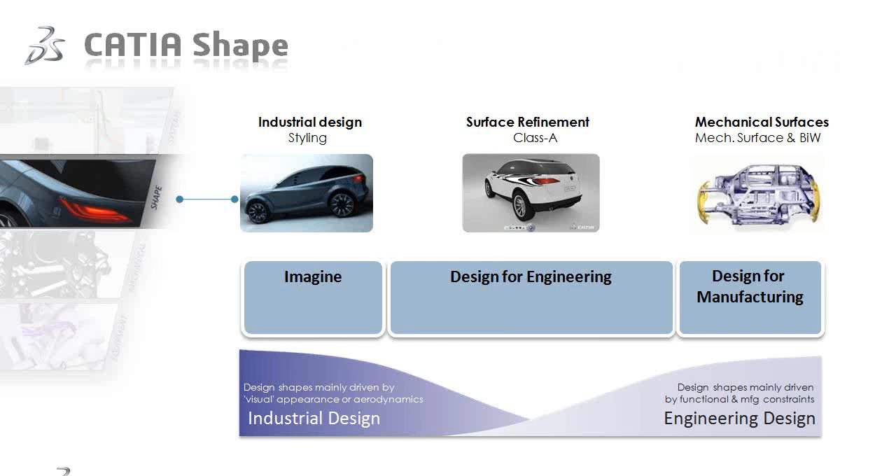Dassault Systèmes now provides 2 solutions on the market for Class A surfacing. You'll find the Icem Surf classical solution, which is still available as a standalone software with a best-in-class explicit modeler for Class A surfacing. So you will find classical modules from Icem Surf: Icem Pro, Icem Master, Icem Magic.

And of course, the main solution Dassault Systèmes wants to push now is CATIA Icem, which is already available in V5 and V6 CATIA releases. Dassault Systèmes bought Icem technology in 2007 after 2 years of partnership because we wanted to provide a solution within CATIA able to satisfy high-end quality surface designers. For that, we needed Icem experience to bring Icem Surf's advanced mathematics into a CATIA workbench, able to keep the history of construction, and finally bring the associative data model to digital sculptors, because it was not available for them, as it was for engineers or manufacturing designers.

So a quick word about CATIA shape strategy. For CATIA Icem, we have two drivers. First, we are focusing on some new direction for the solution, because today if you take a Class A modeler, everyone in the community of Class A modelers, and also of course in styling departments, is trying to make the work evolve and is always searching for the best methodology and best tools, knowing that the industrial context is more and more challenging, especially on the innovation aspect, because it's a key differentiator these days.

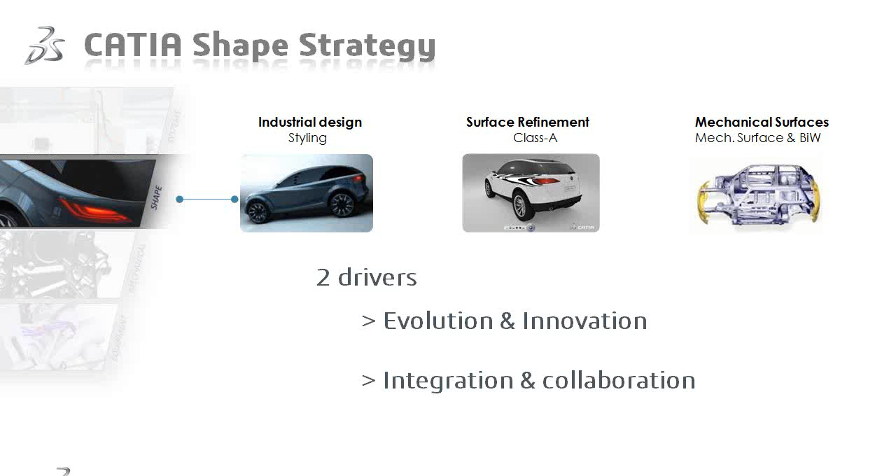So what are the key values? The key values for CATIA Icem is first a completeness of the solution, because we want to bring the best-in-class solution that we have in Icem Surf.

So let's illustrate that in a short video. In this 4-minute video, some of the key highlights that CATIA V6 can bring to you, and how CATIA Icem fits within the overall picture. So you will have an overview of the key phases: ideation, creation, collaboration, and validation phase.

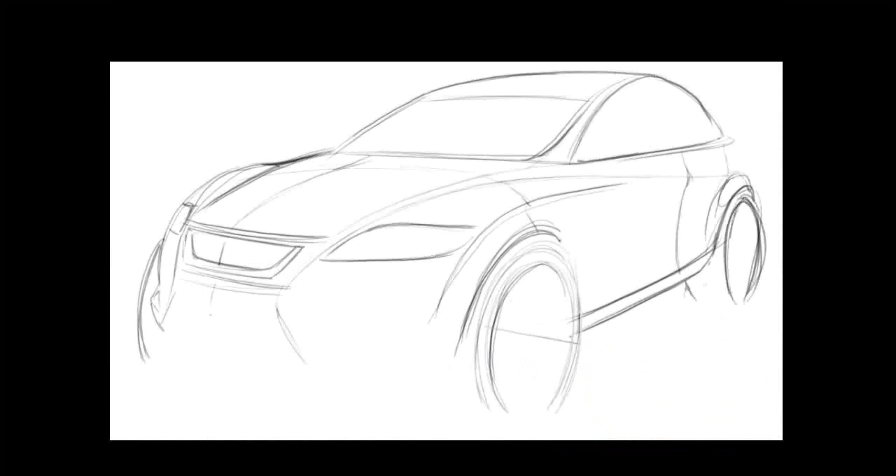So in the concept modeling phase, you can start to draw your idea in 2D, doing your own sketches, and why not get some inspirations through your design communities. You can position directly those sketches in your 3D space, and get then a visual reference during 3D modeling. As you are connected to the company PLM system with CATIA V6, you can also easily search and bring back in your work session some packaging data and start to shape directly with some subdivision surface.

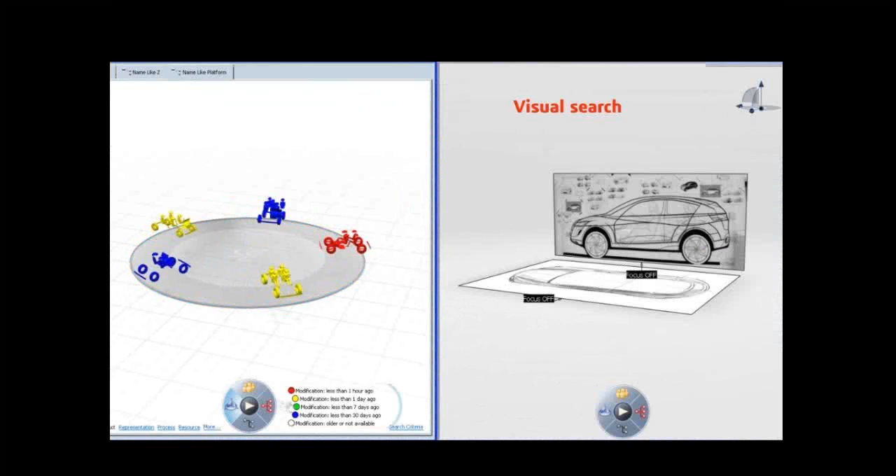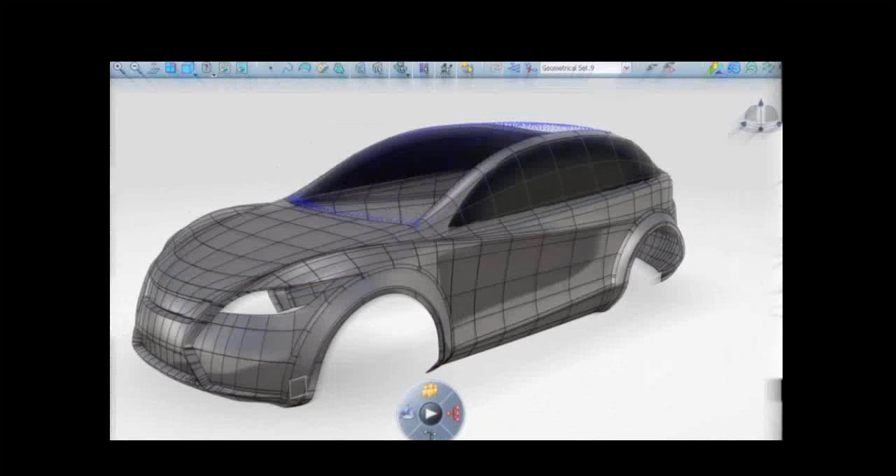Of course, here we are in the very early phase of the styling design. However, the level of accuracy can be pushed at a very good detailing level. Finally, if you also work with some clay models, you are also able to regenerate some subdivision surfaces from the scan data and build some patches from the subdivision, and then iterate again on the final concept.

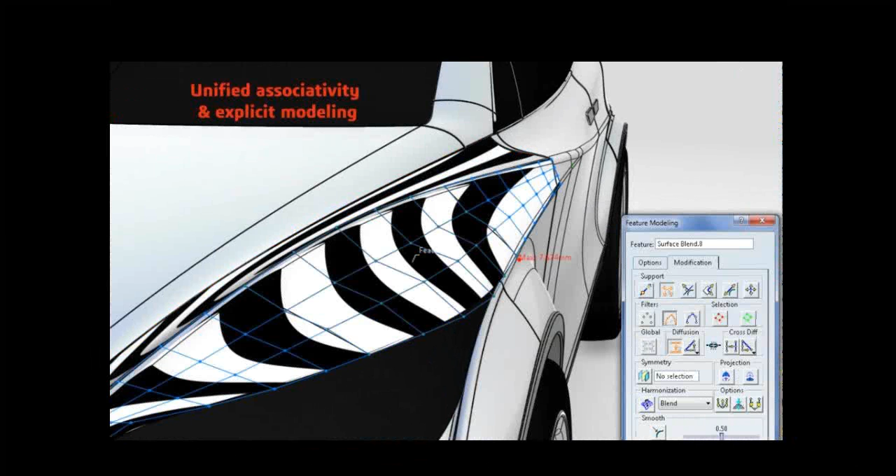So concept being mature enough, you can now produce Class A surfaces within CATIA Icem using traditional explicit sculpting by moving the patches control points, managing symmetry plane, dynamic analysis tools such as highlight zebras here. And as CATIA Icem benefits from CATIA platform, you are also able to refine your shape using associative control points,

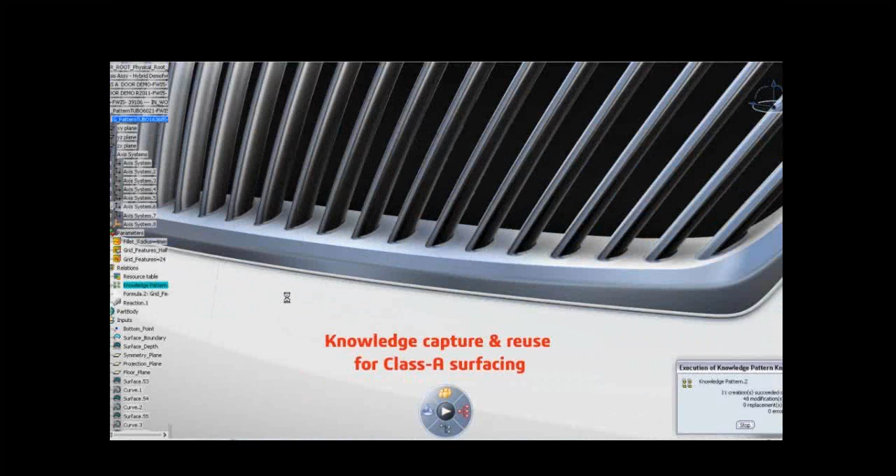feature-based modeling with some dedicated advanced features such as blend here. And last but not least, knowledge-aware templates can also implement CATIA Icem features, so it makes you save a significant reconstruction time. Finally, CATIA Icem also proposes some global deformation tools if you need to iterate on volume proportion, for example.

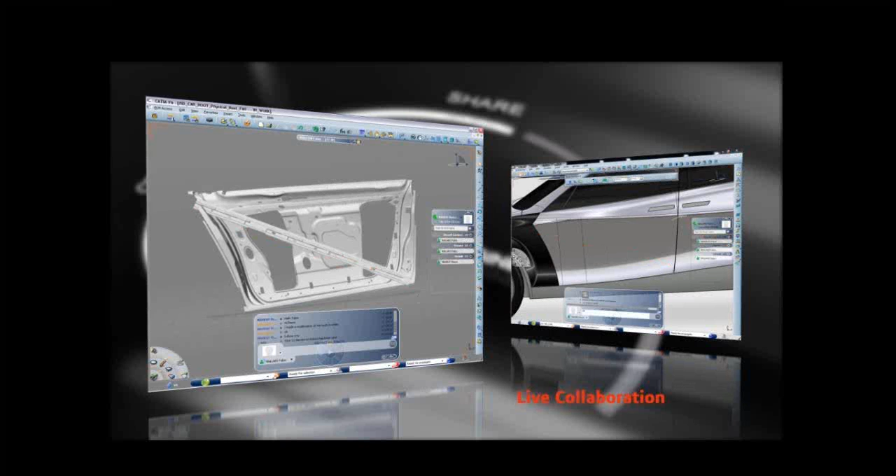So with CATIA V6, we also improve a lot collaborative work aspects. As you can see in the current example, where you have a vehicle architect on the left side, which is showing to the exterior Class A modeler a small clash that occurs between a reinforcement security beam and the exterior surface of the left front door.

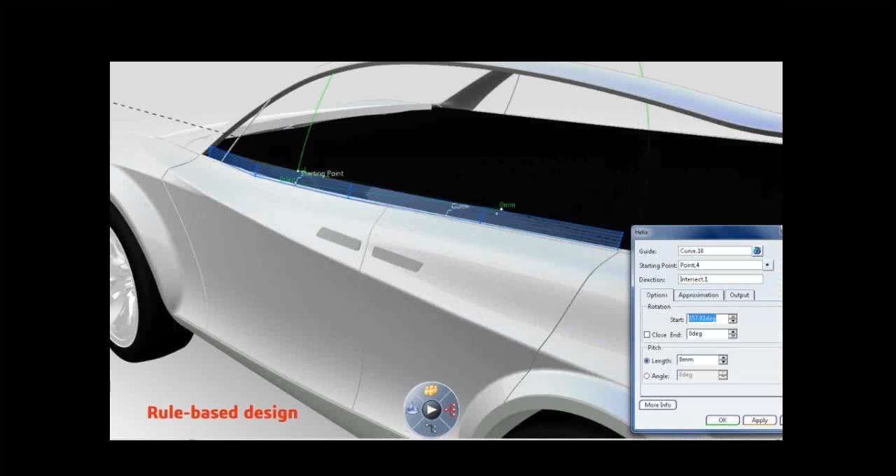So sculpting slightly the underlying theoretical surface will solve the issue, and you'll see that transition surfaces and gaps are updated consequently. CATIA Icem also provides specialized features to build surfaces that have high engineering constraints, like the cylinder glass, for example. And the easy access to a single IP reference for all the companies streamlines a lot collaboration with engineering and manufacturing teams, so it decreases the risk of costly iteration.

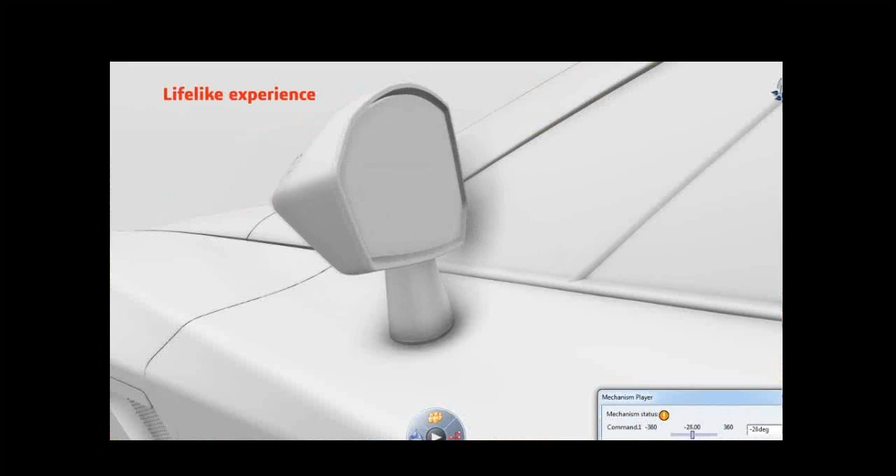And CATIA V6 also has real-time rendering tools that allow users to perform design validation in many ways, like color and trim with real-time rendering and ambient occlusion. With some kinematics, you can have a first idea about the shadow behavior, get a first feeling about the volumes and the proportions.

So finally, CATIA V6 live rendering is using interactive ray tracing technology, and it is very powerful as it allows to produce very realistic pictures of your 3D, even for non-specialist people. So at any time you can modify geometry, get back into CATIA live rendering, and get a pretty good idea about how design will look in the real life.

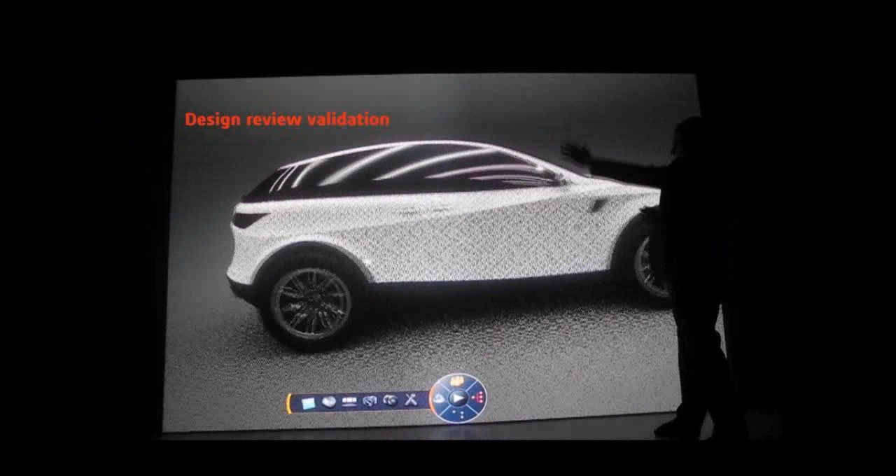So several HDR environments are available and can be easily changed. Geometry can also be modified, emissive light can be put on it, and you can imagine how it can facilitate and speed the discussions during a design review. So here you have many examples of what can be done with a full solution.

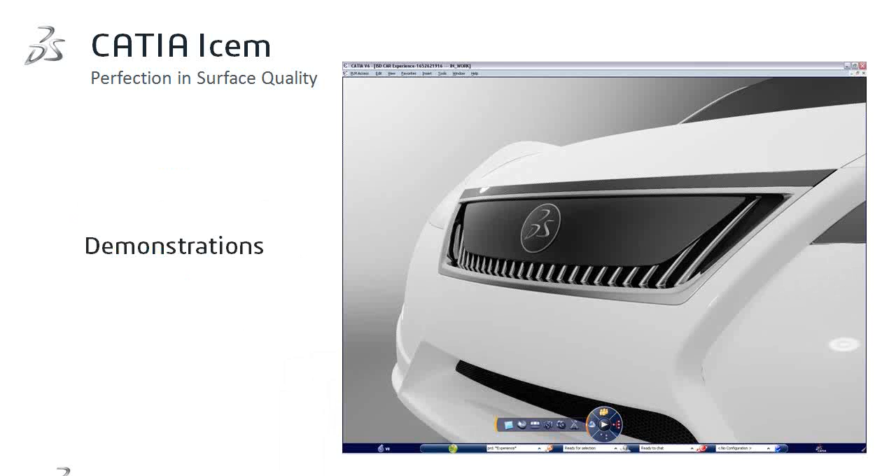So it was a quick overview to illustrate what CATIA Icem brings to the whole picture. Now we are going to switch to a more detailed demonstration. I will let Fabio take hand of the presentation and detail what you've seen very quickly in this teaser. Thank you, Laurent. Let's first have an overview of the demonstration.

We will start by using 3D search in order to retrieve the data I need for the modeling. Then we will see CATIA Icem capability. We will also see an integration between CATIA Icem and other standard workbenches, like KnowledgeWare. And finally, we will have a look at the new product called CATIA Live Rendering.

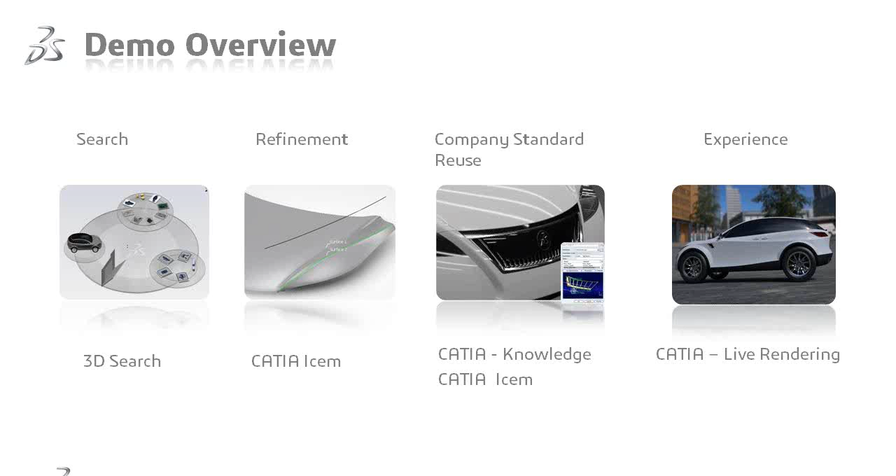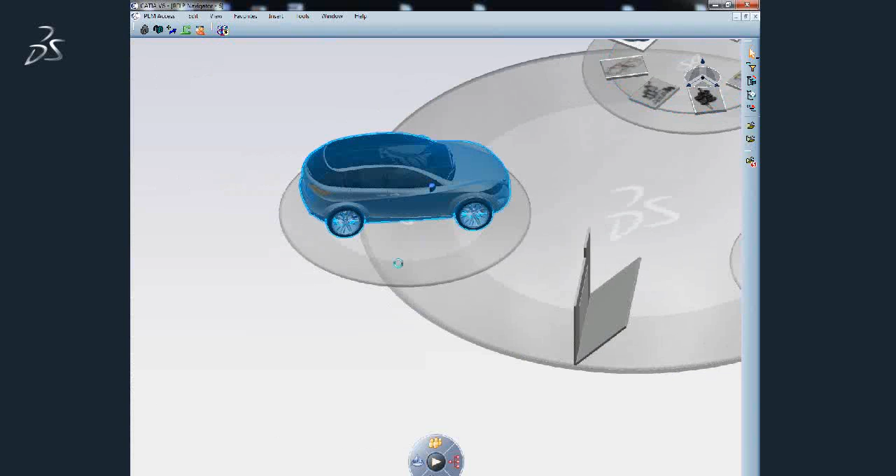So here we go. Using the PLM toolbar, you can retrieve your data by simple search, as Google Search does, and you have a 3D view of your model, directing all the data you need to start design. This is very important, the V6 value. It is based on a unified platform, a single IP reference, and you share data with people from engineering.

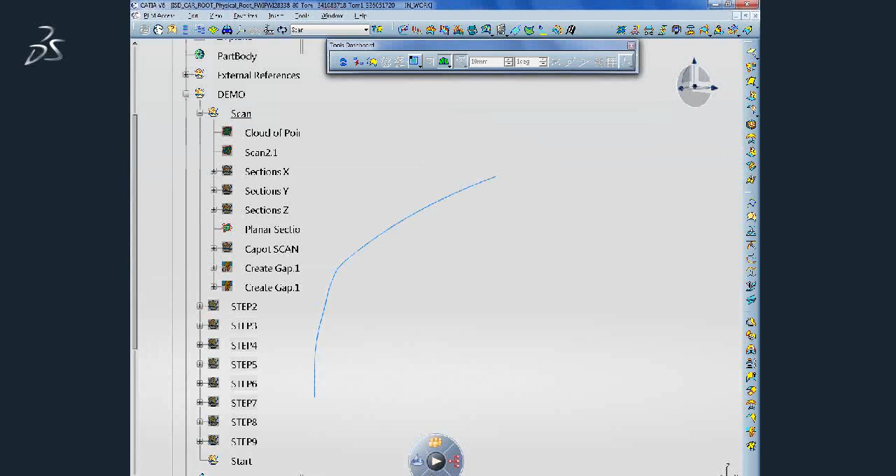And you can start your designing in context. Here we can see an example where I took some information with colored legend. Let's move on to the CATIA Icem workbench. CATIA Icem guarantees explicit modeling as Icem Surf does, but in addition we offer more powerful capability which we will see during the presentation.

As you see, you can create your shape by using a curve approach or direct surface modeling. In this example, I start with a curve near a point, and then I move the control point on the resultant surface. And of course, I can connect surfaces thanks to matching constraints common up to G3.

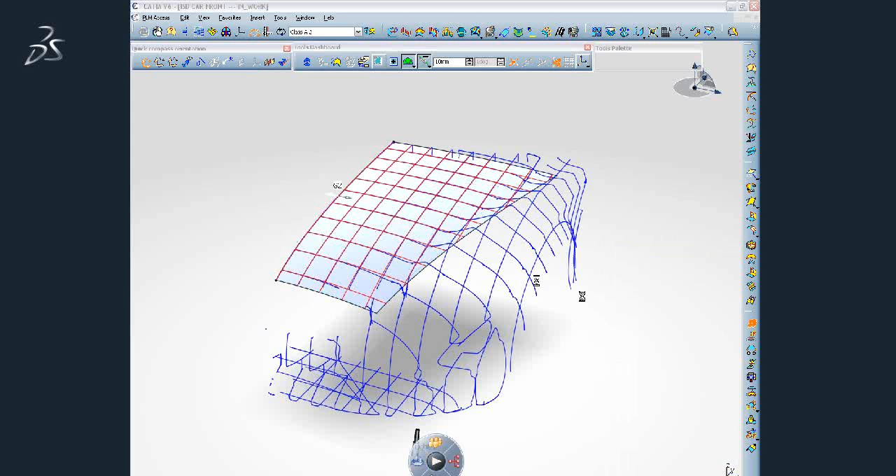Another way can be to fit a patch directly on the cloud of points. Here we see an example.

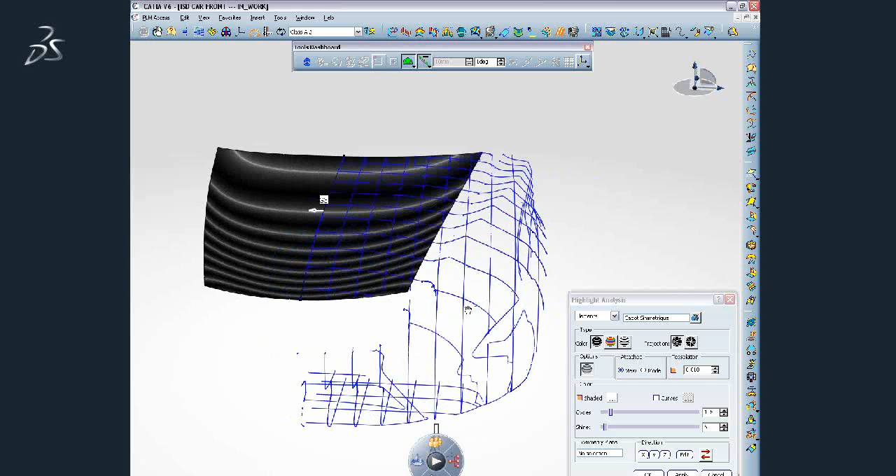So once I've created the geometry, I like to measure the quality of the shape. For this, CATIA Icem provides a set of analysis tools dedicated to the Class A workflow, allowing concurrent verification of styling requirements and feasibility. Here we have an example: some highlight analysis, plate analysis, and user curvature. We also have other kinds of analysis, mirror, etc.

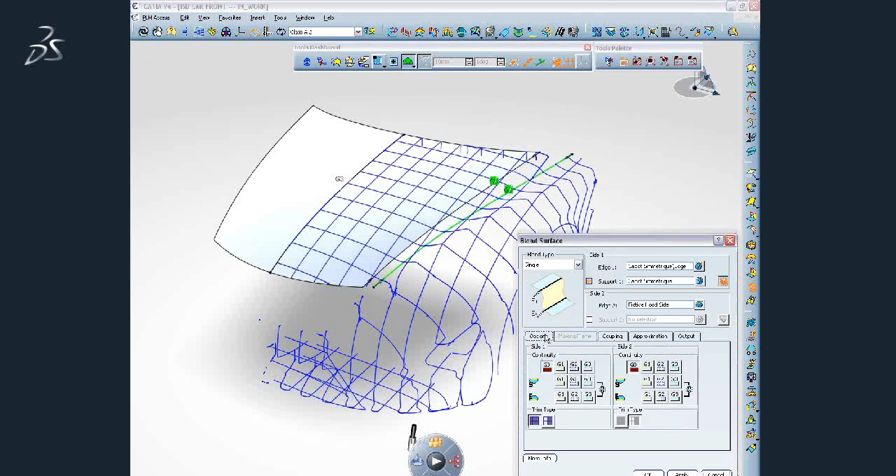Moving a step forward in the modeling, I can improve the efficiency of my model using some associative feature commands. CATIA Icem surface features are based upon their specification and input. This provides the user the ability to modify the parameter value of the specification to quickly produce variants, as well as incorporate engineering and manufacturing input like die angle or draft angle, but also introduce legislative parameters into styling during creation, like minimum radius value.

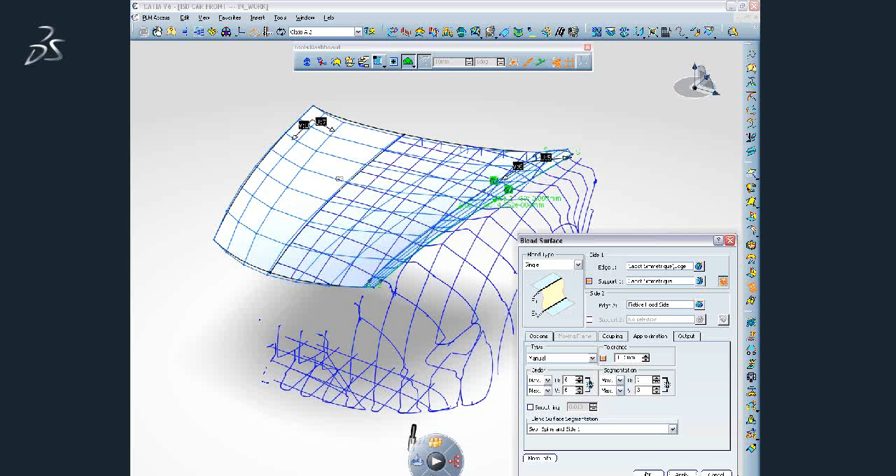As most ISD commands are feature-based, by definition we maintain an associative link to their input, providing the capability for resultant geometry to react to modification of their input. Thanks to this, the user is able to initiate faster iteration during the initial design phase, integrating the design intent, enabling coherent modification, and variants can be easily obtained by modifying input elements.

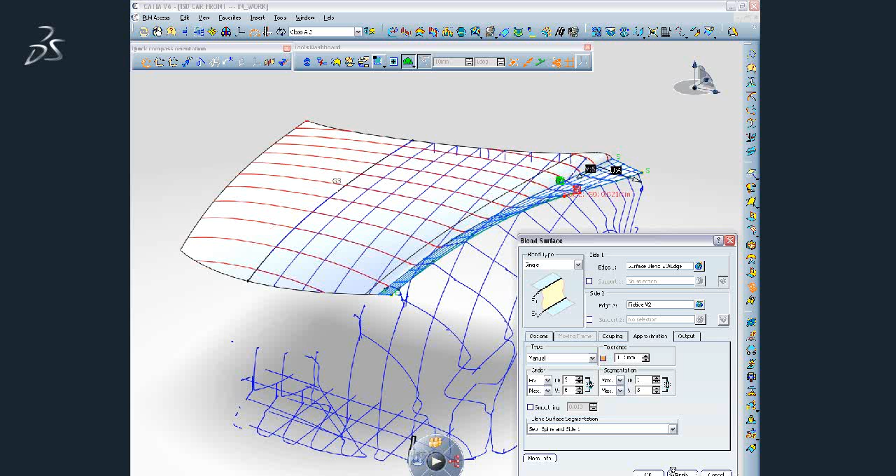Finally, one specific aspect of ISD is the control of the approximation. Anytime you want to compute a surface, you can consider that you are trying to approximate the perfect shape. The user is interested in optimizing the complexity of the shape in terms of segmentation while respecting a given tolerance. The user is able to iterate inside the panel, getting feedback on the results. It can work in automatic way on a full model world. This is a very flexible way to control the mathematics of the shape.

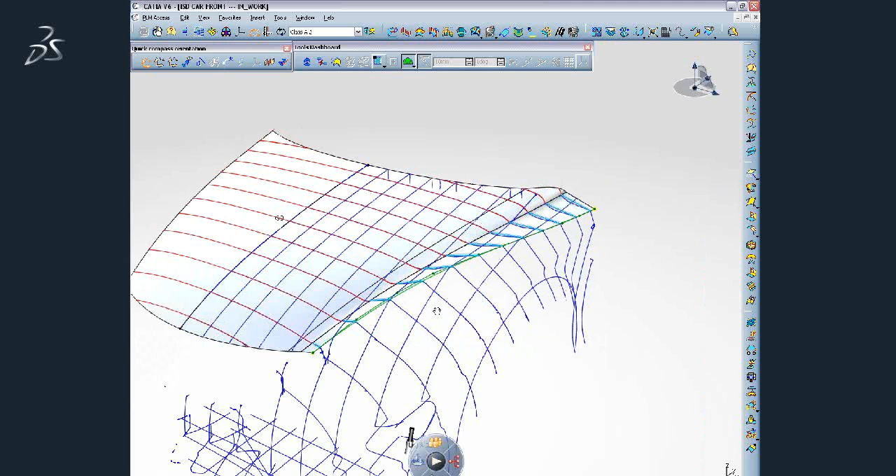Moving on, I can also take benefit of feature modeling capability. This function is pretty unique in the market. The feature modeling concept within CATIA enables users, through an interactive method, the ability to modify the geometric element of the feature while it continues to remain a feature. The user is still able to create and modify the input parameters of the feature result in the usual way, but now with the added advantage of being able to directly modify the geometry by its control point, like in the explicit world. This can be done for final tuning or for feature quality improvement where needed.

So here we see an example. We have created a surface, and then we can get back to the feature and change some parameters, like in this case the approximation of the region. You will see, modifying it, and getting back to the feature modeling, we start to move the control point of the resultant geometry. Again, for final tuning or for quality improvement if needed.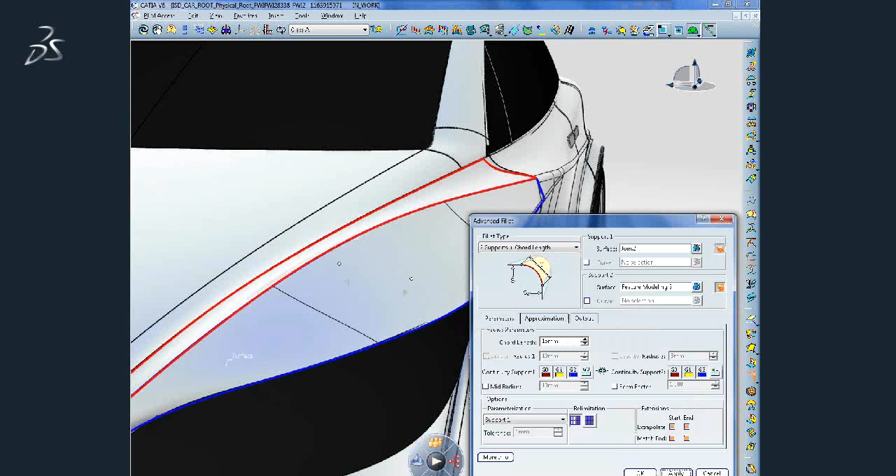Again, I can start, iterate, change some parameters, and just apply. Everything is updated in one click. And even if I move a patch control point, associativity is kept and the whole structure is automatically updated. So here we change some patch, the input parameter of the feature, but we still get the connection and the result.

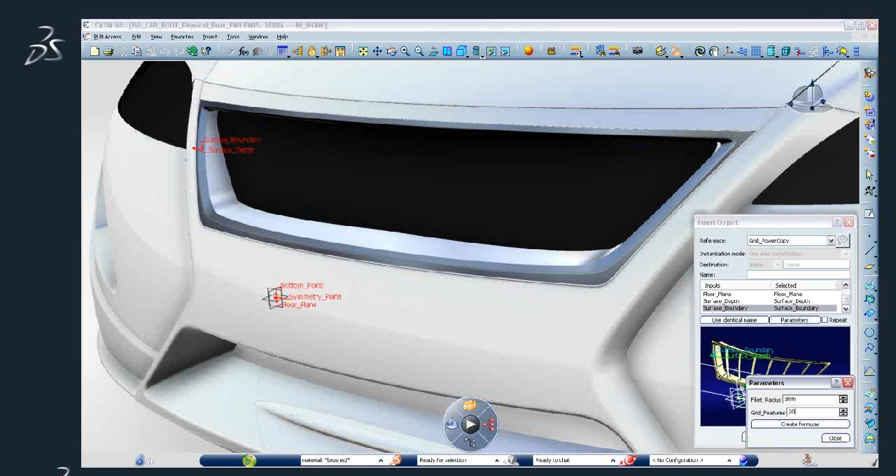To complete my design, I have to create a front grid of the car. I will use an automated generation of the geometry by executing a knowledge pattern created by a colleague. In a few seconds, I can generate a grid with vertical ribbons with G3 fillets, following a few input geometrical elements. This is full parametric, and I can now modify what I've generated.

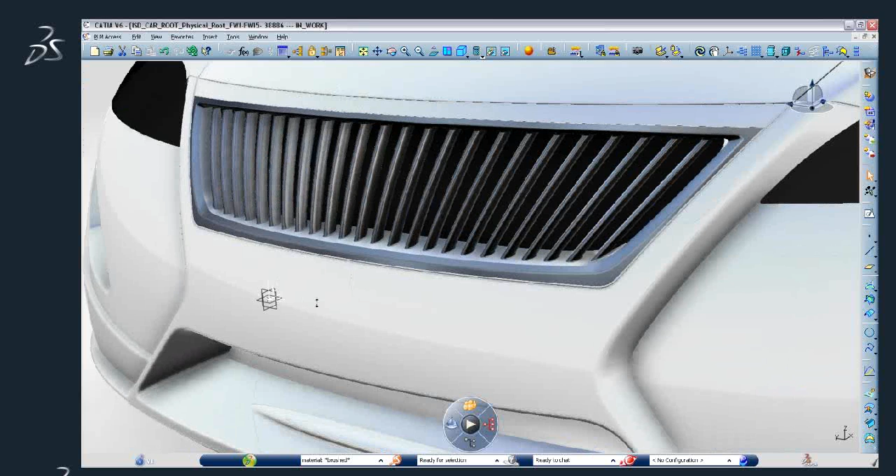I can now modify the number of vertical ribbons and in one click just update it. And as well, I can modify the fillet value. The space and the angle of the ribbon will change interactively in this example. This way, I'm able to reuse company standards and save a lot of time while creating detailed geometry.

One important aspect of the solution is that we have introduced a new product called CATIA Live Rendering, to offer customers a new way to render with an interactive raytracing solution. The goal of this solution is to provide an easy, integrated way to do photorealistic imagery.

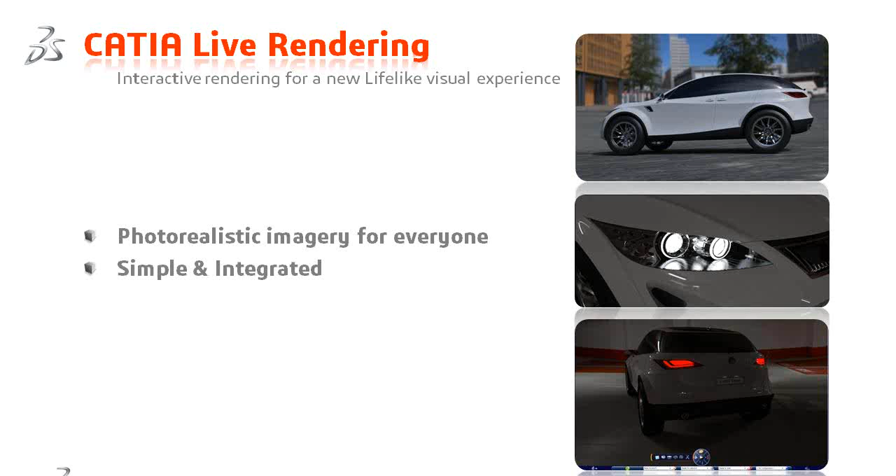It is very important for everyone to be able to communicate and present the design with very high-end visualization, but without spending hours and days of work in terms of computer-generated imagery.

With this solution, we introduced the notion of interactive raytracing. The goal was to have no compromise on the quality of visualization, to have the best-in-class visualization solution with all the aspects of raytracing, but at the same time to be able to change the shape, the color and the material, and at the same time visualize the physically correct object. It is based on a rendering engine called iray from mental images, which is integrated in CATIA.

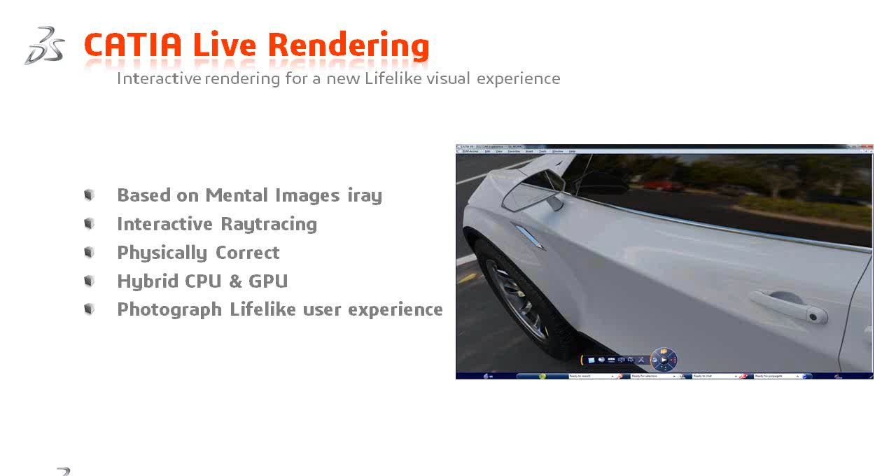It is interactive raytracing, it is physically correct, and it's taking the full power of the CPU but also the graphic board. And the user interface is very simple, similar to Photograph Lifelike. So in a few steps, you can create outstanding photographic imagery.

The important point is that at any time you can change the shape and activate the rendering to visualize the real-life result. And then you can start to navigate all around your object and visualize the behavior of the material in the shape.

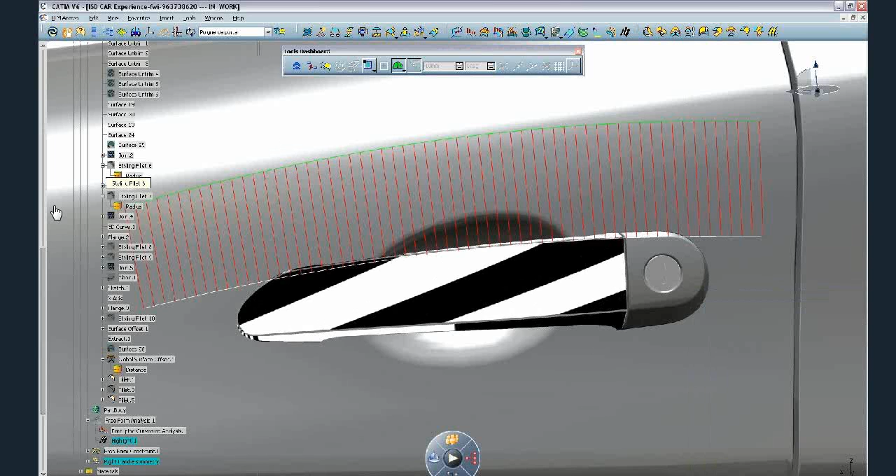For lighting purposes, it is based on image-based lighting, so you don't have to spend hours setting up your scene and your light. You just have to select from a library of images called HDRI and bring it into the scene, and then you can see your object within the environment you have selected.

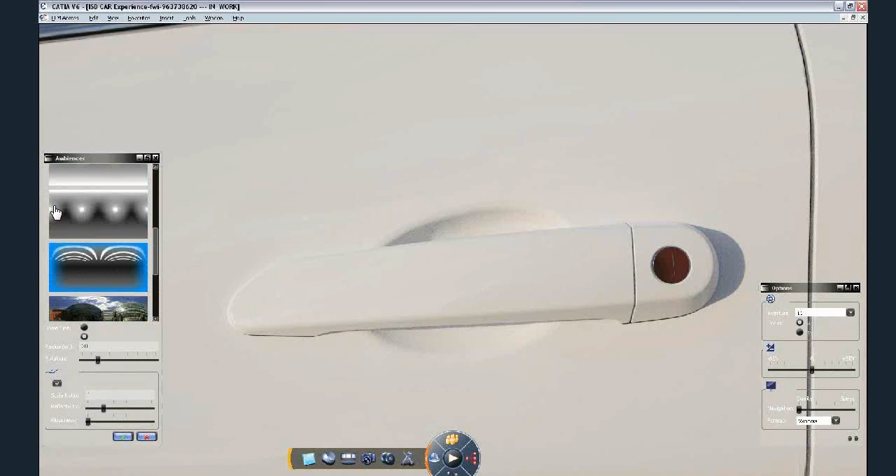So in this example, you can change the shape of the door handle anytime, and you can reactivate the interactive raytrace to visualize the results. It should be part of your creation step.

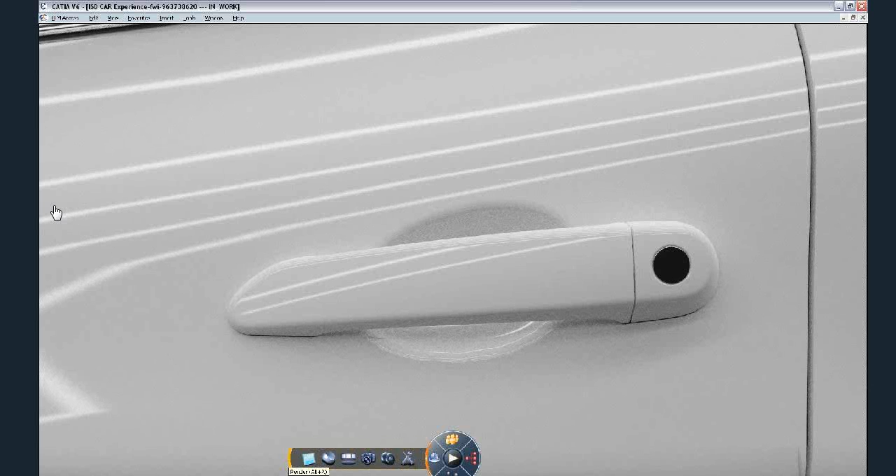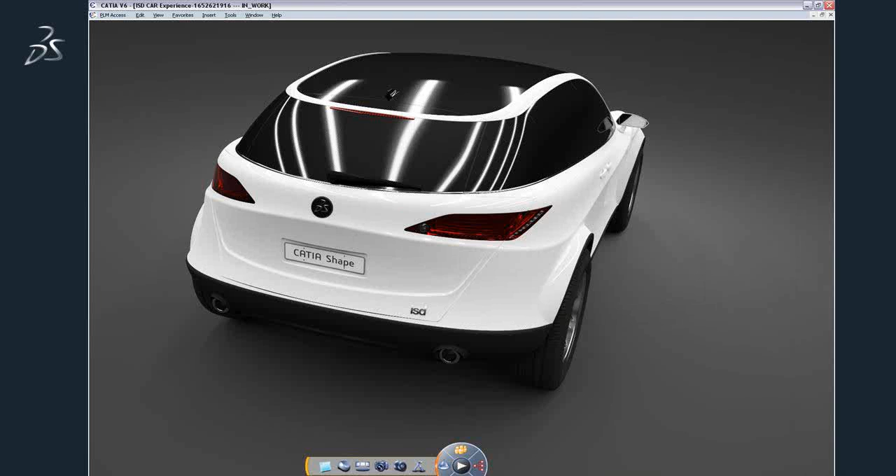Changing the HDRI here, and just to zoom out, we have the complete vehicle. So some examples of rendering — if you wait for a few seconds, this is the kind of visual quality you can achieve.

We can also simulate the fact that material emits light. Here we see some examples.

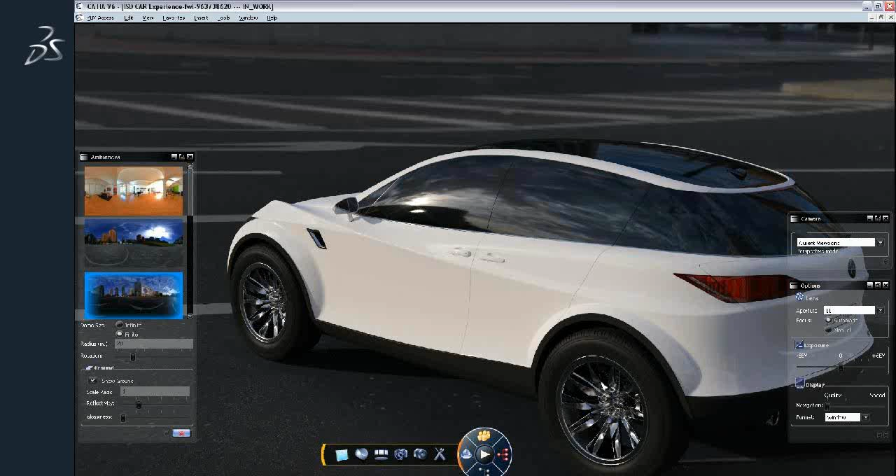And another example here — you can see all the reflection between the side mirror and the car. So you can really notice it is a real-time interactive raytracing solution, managing all the shadow but also the reflection from object to object. It is very easy to produce high-end, photorealistic images without spending hours setting up materials, scene, and light.

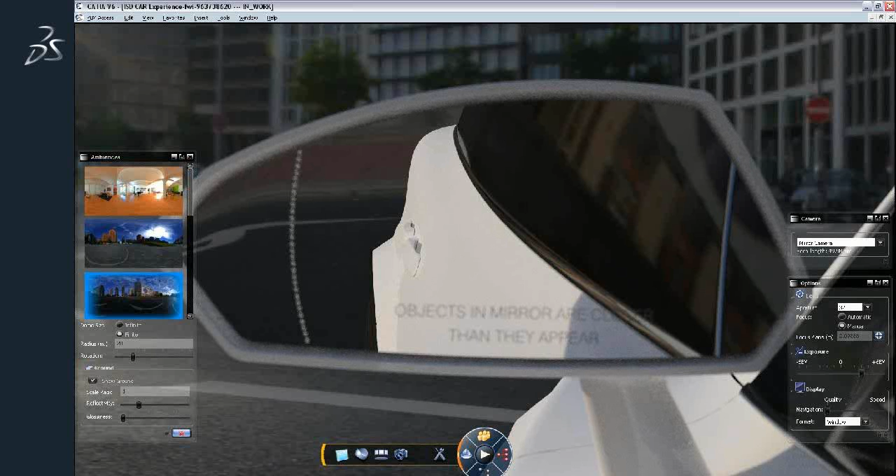So I'm done for the demonstration. I give the hand back to Laurent, and thank you for your attention.

Thank you, Fabio. So again, I want to remind you of the key values for CATIA Icem that we're proposing, mainly in CATIA V6, which is the fact that we have integrated the Icem knowledge for surfacing technology into CATIA.

We have a unified surfacing solution, meaning that you are able to mix, if you need, the design from CATIA Icem with subdivision surfaces and with mechanical surfaces that you usually use in the GSD workbench, for those who already know CATIA.

And you're also able to add thickness to the parts. This will, of course, streamline the design collaboration a lot, because you will be able to communicate more easily with connected specialties, whatever they may be — styling teams, engineering teams, even manufacturing or composite teams, for example.

And of course, as everyone is able to access the best of our data, again with good security in the company, the global network for design will be connected, so it should reduce a lot of mistakes and misinformation within the company.

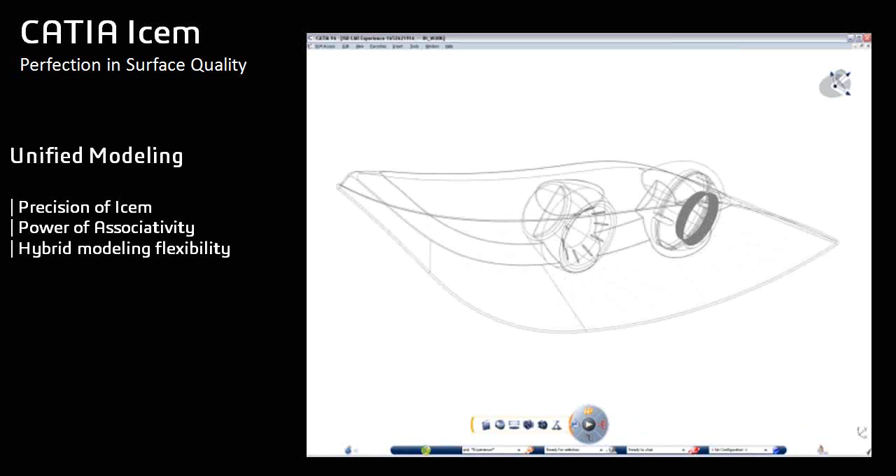So if you have two aspects to remind concerning CATIA Icem solution: first, we have kept the unified modeling, so we have kept the precision of Icem in CATIA. We have added the power of associativity, and you have the hybrid modeling flexibility, able to reuse other CATIA features within the solution.

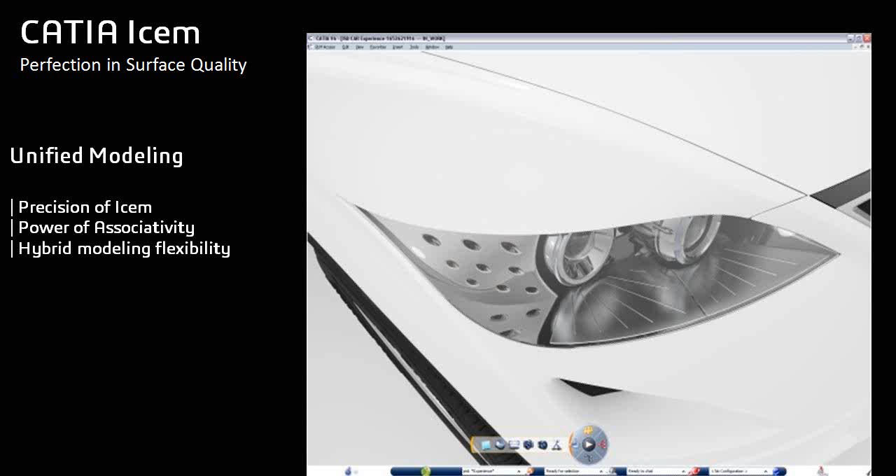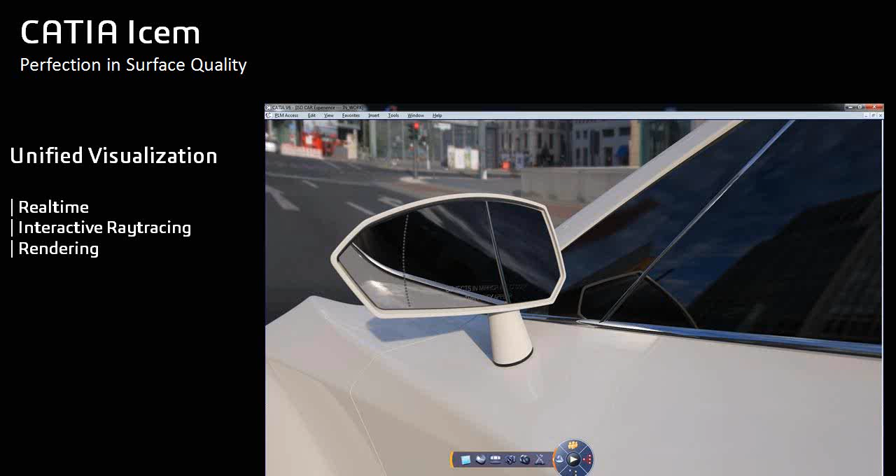And in CATIA V6, we have a unified visualization. It means that, as we saw in the little teaser, we have a nice real-time rendering solution for ambient occlusion and for color and trim. You have the interactive ray tracing with live rendering, so what Fabio just illustrated. And you still have the usual computed rendering that's been available in CATIA since the beginning of V5.

So just to end this presentation, I wanted to share with you a small movie, which obviously doesn't work. So Eric, I think we're done with the presentation because the movie is not broadcasting, so I don't know what's happening. I think we're ready for any question and answer session because it was a quick overview.